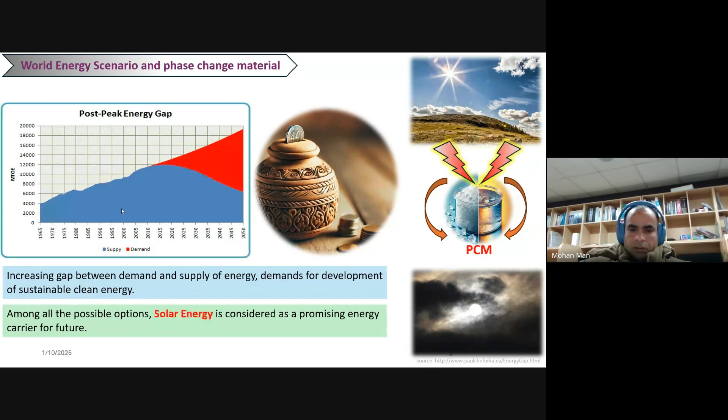So in continuation of the world energy scenario, we can see that was the fundamental of the energy storage material. If we go a little more technical, we can see there are two types of energy: high grade energy and low grade energy.

Low grade energy is what we need to utilize in real time applications or domestic household applications. So when we convert high grade energy to low grade energy - high grade energy is electrical energy, chemical energy, kinetic energy, and nuclear mechanical energy. These are the high grade energies.

But low grade energy is what? Directly heat, waste, radiant heat. Suppose we want to warm water or cook food - this type of energy is called low grade energy.

This thing already Dr. Adarsh Pandey has given in his talk. Then whenever we convert high grade energy to low grade energy, there are some losses.

So in this way we can utilize the phase change material or the energy storage material. Throughout this presentation, sometimes I will use the term energy storage material and sometimes phase change material - both are similar. Energy storage material is a vast category, and phase change material is one category within it. So please consider energy storage material and phase change material as having similar meaning.

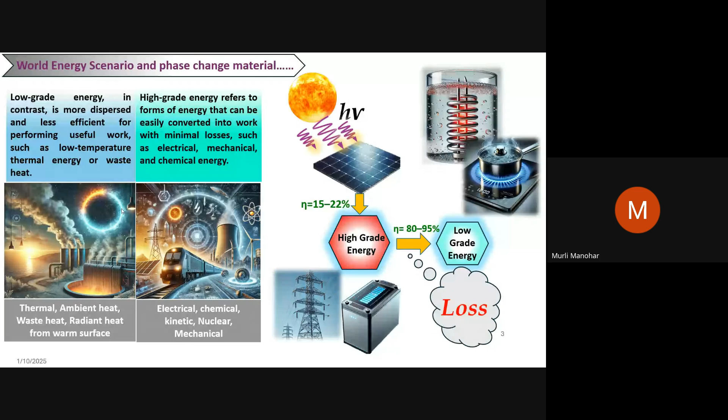So whenever we are converting solar energy through photovoltaic modules, there are some losses. Nearly, as you can see, the efficiency of the collector is only 15 to 22%, so roughly we can say there is a loss of 80% in this case.

So already we are getting a loss of 80% when we are converting solar energy to electrical energy to store in the battery or some other medium. Already we are getting a loss of 80%.

If we further convert that electrical energy to utilize for low grade energy, like using electricity to heat water or cook food, in that case also joule losses will occur. Joule losses happen when electrical energy is utilized to convert it to heat.

In that case also the efficiency is 80 to 95%. So in this way we are again getting a loss of 5 to 20%. So in this way, we can see the losses.

So what can we conclude from here? If we are converting high grade energy to low grade energy, there are several losses. To avoid these losses, what does the PCM do? PCM can store energy in low grade form only, meaning PCM can store energy as heat only, not in electrical form.

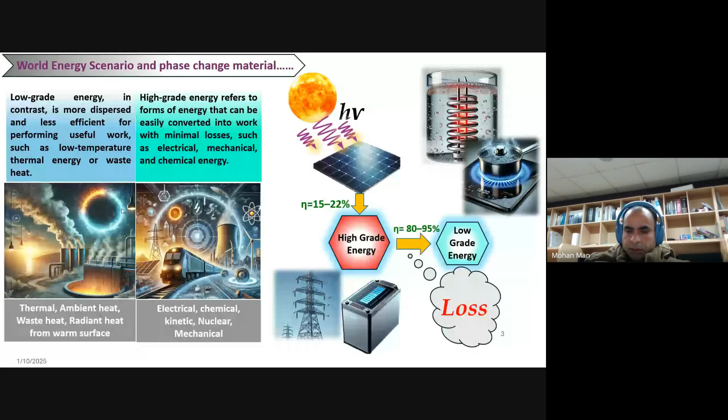Now, these were the scenarios of phase change material. Now let's start with the fundamentals - what is phase change material and their types?

First, I wish to introduce phase change material as ice and water. In case of ice and water, everyone knows ice has three phases: solid, liquid, and vapor. At a certain temperature water becomes solid, and at a certain temperature the solid becomes water. In this way we can say ice and water is a phase change material.

Similarly, paraffin wax - in general we can just say wax - is also a phase change material.

Generally we are using these for energy storage application, thermal energy application. You can see in the figure, wax is like what we use to make candles. That is the phase change material, or paraffin wax we can say. And also salt hydrate, which is also a phase change material, but the melting temperature of these materials is a little higher than paraffin wax as well as the ice-water combination.

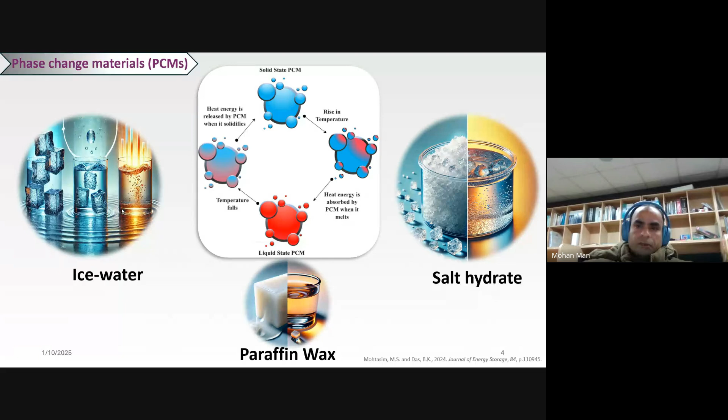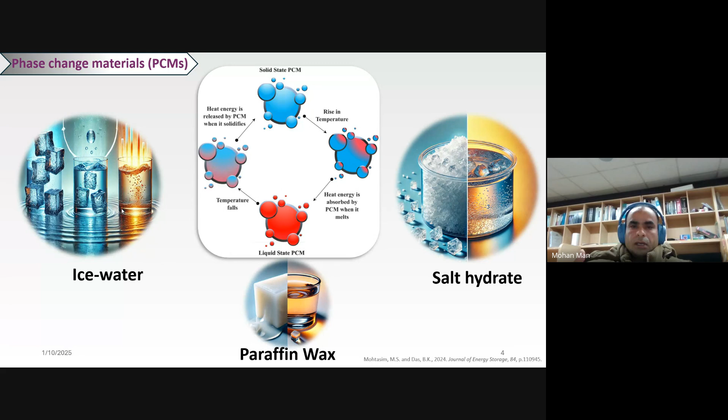Further we will go about this phase change material's phase changing temperature. In the middle figure also you can see how the phase change material takes heat and converts its phase, and how the heat transition takes place. So in the solid state, if we raise the temperature, it will change phase and become liquid. And further, if heat from the liquid phase is transferred to the surrounding or other medium, it will again change its phase and become solid.

Now this was the fundamental of the phase change material and the scenario. Now we will go for the multifunctional PCM. As literature says, in early days phase change material, or PCM in short, was utilized only for thermal energy storage.

As demand increases, as material efficiency, cost effectiveness, and compact design come into existence, everyone goes towards multifunctional things. So in this way, multifunctional PCM also comes to the picture. When material efficiency is required, multifunctional PCM combines multiple properties into a single material. Further, in the upcoming slides, we will see what applications exist, through which we can say PCM is a multifunctional material.

So as of now, I only discussed thermal energy storage. In a later slide, I will go for their diverse applications. Based on that, I will define multifunctional PCM. So now I'm going only into what is multifunctional PCM and why multifunctional PCM comes to the picture.

Further, when cost effectiveness comes into the picture, by integrating multifunctionality such as optothermal conversion or EMI shielding, if someone wants to make such a material, all the functions will come together in a single material. That is called cost effectiveness. In such a way, the multifunctional PCM comes to the picture.

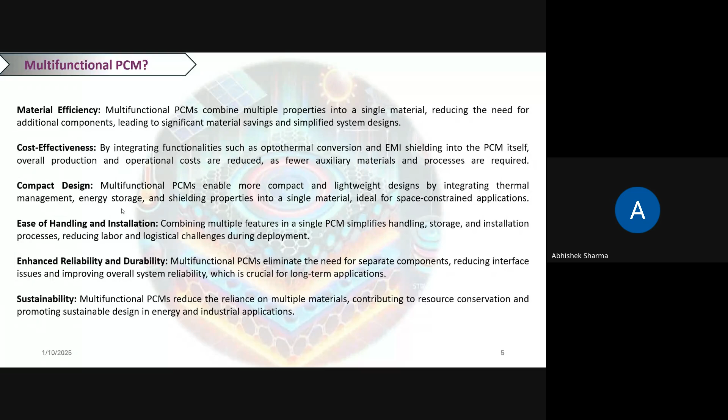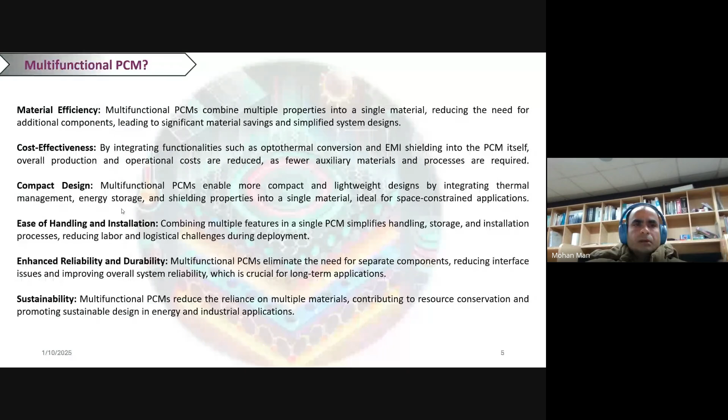Okay, so material handling and installation will become easy in case of multifunctional PCM. So these are some basic things through which we can understand why multifunctional PCM is needed. In short, I can say to save money and to save effort, we can design the multifunctional PCM, or we want to design the multifunctional PCM.

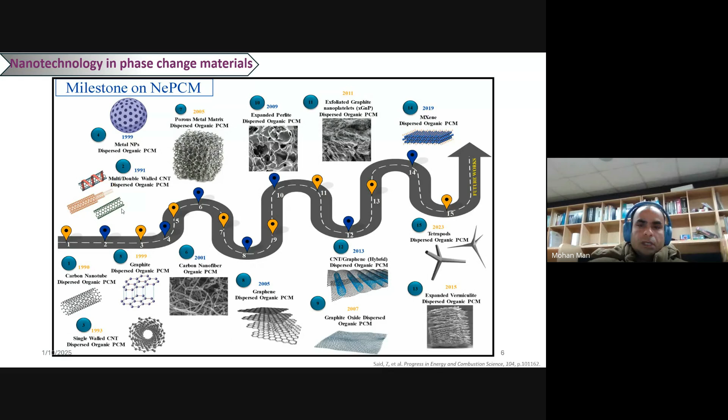These are the journey of phase change material from 1990 to 2023, and it's still going on. I'm also trying to get some better results through incorporation of not only 1D, not only 2D, but hybrid material. I'm trying to get the multifunctionality of the phase change material.

So as I already told you, phase change material is nothing but an energy storage material that stores energy by changing phase. I will discuss more about phase change material in upcoming slides. These are some types of phase change material, basically categorized into 3 types: organic, inorganic, and bio-based PCM.

Organic PCM is the most common research material, I can say, because I've gone through many publications. In most publications, I have seen organic PCM. Why? Because organic PCM is easily available, non-corrosive in nature, and its melting temperature is also suitable for a wide range of applications. The only disadvantage of most phase change materials is their low thermal conductivity.

Especially organic phase change material has the disadvantage of flammability. It easily catches fire. So this is a disadvantage, but there are several advantages of organic phase change material.

The fundamental phase change material as an organic is paraffin wax. Further, organic phase change material is divided into 2 categories: paraffinic and non-paraffinic. Paraffinic derives from petroleum products, whereas non-paraffinic is fatty acid, alcohol, ester, glycols. The most common examples are stearic acid and lauric acid, whereas paraffinic is paraffin wax. If we compare these two, paraffinic and non-paraffinic, the advantage of non-paraffinic is high latent heat.

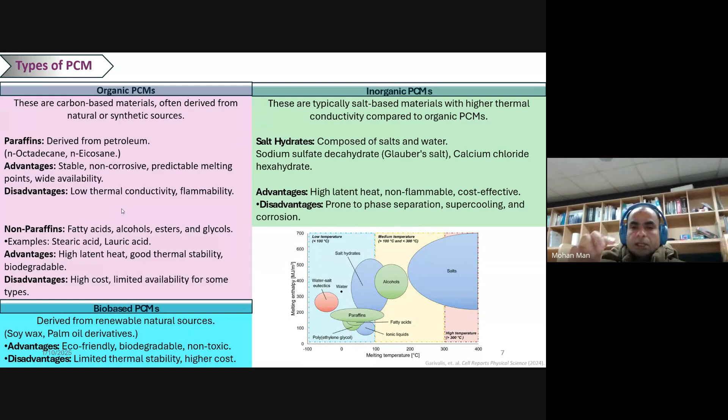So what we can correlate from this: if we want to store heat from the solar, we need less amount of salt, whereas to store the same amount of heat, we have to utilize more paraffin wax or other materials having less melting enthalpy. So based on these things we have to design the energy storage system. Later we will discuss how we can find this melting enthalpy through experiment. I'm going to give some brief introduction to calculate or analyze this melting enthalpy. Okay.

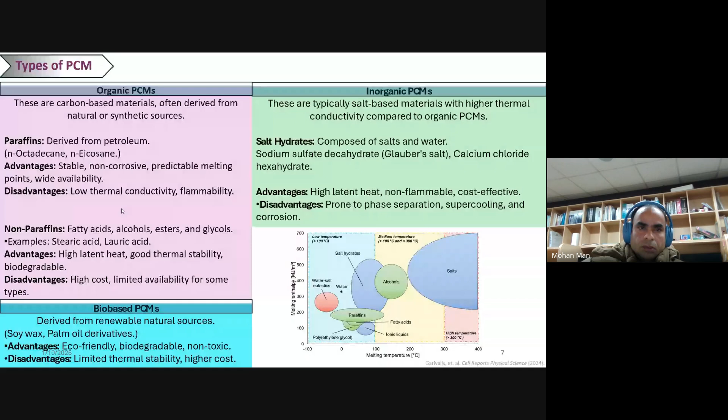So from this slide, we are going to understand once again the principle of phase change material, how the phase change material stores the heat. I think you might be aware of sensible heat and latent heat. So in case of phase change material, as the name implies, phase change means phase is going to change, either liquid to solid or solid to liquid. Only the heat when the phase is changing is what we can utilize in case of PCM.

So when the phase change occurs, what heat is useful? Not the sensible heat, only the latent heat comes into the picture. So in short, in the fundamental principle of PCM, only the latent heat is utilized. There are certain other energy storage materials that utilize sensible heat also. Sensible heat is when the temperature of the material is rising but the phase is not changing. But when the temperature is constant and the phase is changing, that is the latent heat.

Through one basic fundamental example, I wish to convey this message once again. When we start boiling water from the normal temperature of household water, like 25 degrees, and the boiling occurs at normal atmospheric pressure, what is the temperature? In that case, the temperature is nearly 100 degrees. So when we start boiling water from 30, or whatever the room temperature is, let's consider 30 degrees as room temperature. From 30 to 100, the temperature will rise, but water will not change its phase.

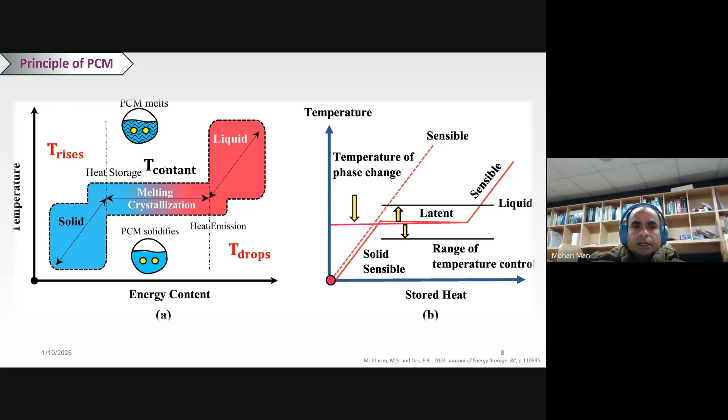I will tell you this in detail in the next slide again. So these are the fundamentals of phase change materials. In short, phase change materials utilize only the latent heat, when the phase is changing and the temperature remains constant.

Now, limitations of PCM. In general, not only for organic or inorganic, all three kinds of PCM, organic, inorganic, and bio-derived PCM, which I discussed earlier, have two major disadvantages: low thermal conductivity and leakage during phase change. Apart from these two, there are more disadvantages, such as supercooling, phase separation, volumetric expansion, cost, corrosion, environmental safety, and other things that we are not going to discuss. Definitely we have to work on those, but the major disadvantages are low thermal conductivity and leakage.

As the name itself says, low thermal conductivity. In the figure you can also see it has less tendency to transfer its heat. Very fundamentally, if the PCM has stored energy, it's not able to transfer that stored energy efficiently. That is low thermal conductivity.

Also, if the PCM is changing its phase while kept in a certain container, it will transfer its phase from solid to liquid. In that case, it can leak from somewhere. So this is one more thing that we have to address through nanomaterials. How can we stop this leakage, and how can we improve the thermal conductivity? These are the two major things.

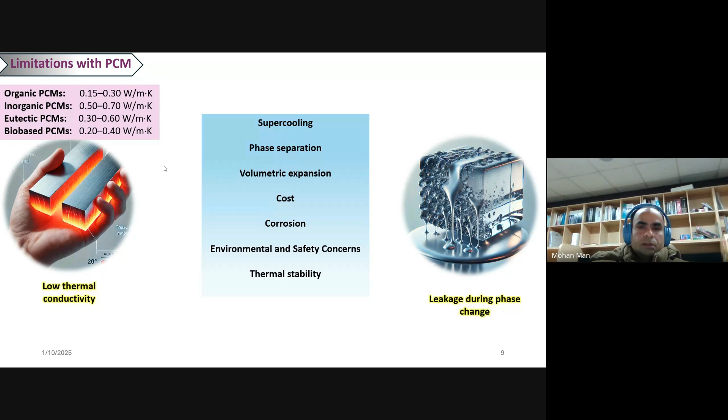Maybe you have some doubt why we are focusing more on thermal conductivity, because if you see the literature, most of the research work focuses on thermal conductivity. Why we focus on thermal conductivity, we will see in the next slide or an upcoming slide.

As we have seen the disadvantages or drawbacks of PCM, now we will go to the required properties of PCM. In the case of thermal properties, you can see high latent heat of fusion. As I already told you, a PCM having high latent heat or heat of fusion means that when it changes phase from solid to liquid or liquid to solid, it should store more heat. That is the most important requirement for an energy storage material. Also, appropriate phase transition, I would say appropriate based on the application.

So you can see the household or domestic application needs temperature around 60 to 80 degree or 40 to 80 degree. But for industrial application, the temperature range is a little higher, 200 or 400 degree. So based on the application, the phase transition temperature of the phase change material should be available. High thermal conductivity is one important property of the phase change material,

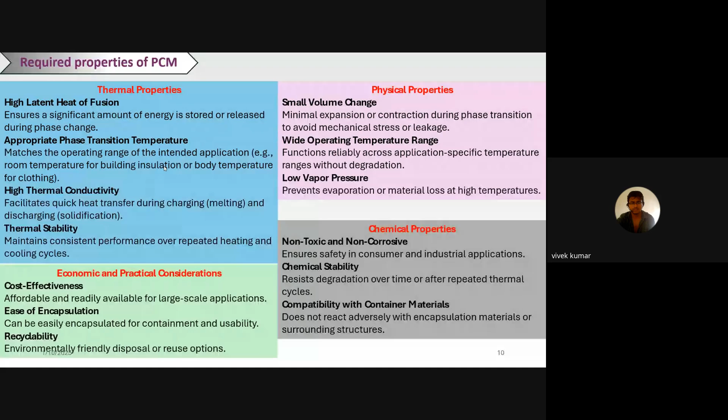Okay. So I was talking about the thermal conductivity. The material has already stored heat in the daytime through the solar collector, so it possesses certain heat. If you want to utilize that heat for any application and the thermal conductivity is high, it will easily release the heat to the room or any application. We will discuss this further. So this is one more property that we want.

So if you heat the coconut oil at very high temperature, what will happen? It will evaporate. Take a pan, put the coconut oil in the pan and start the burner. It will start fume formation, and it will evaporate after a certain time. So thermal stability is also one important property. If we are utilizing a phase change material at a certain temperature, the material should not degrade its property, and mass transfer should not take place. That is the thermal stability.

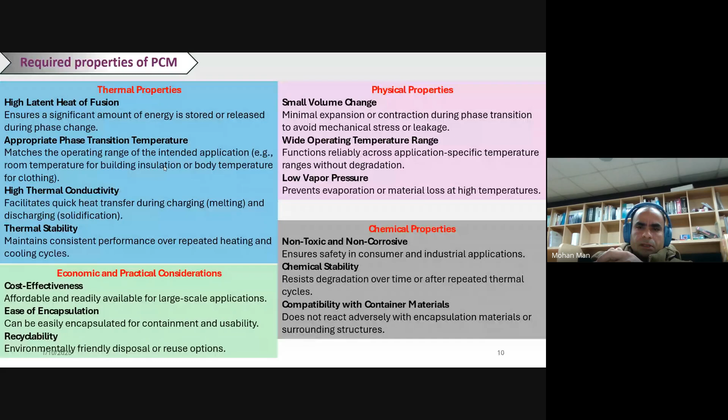Also economical, as you know, is a very common thing. Cost effectiveness and recyclability: these are some economical and practical considerations. Chemical properties: it should be non-toxic, non-corrosive. Chemical stability, as I already told you, compatibility with container material, that should be not corrosive in nature.

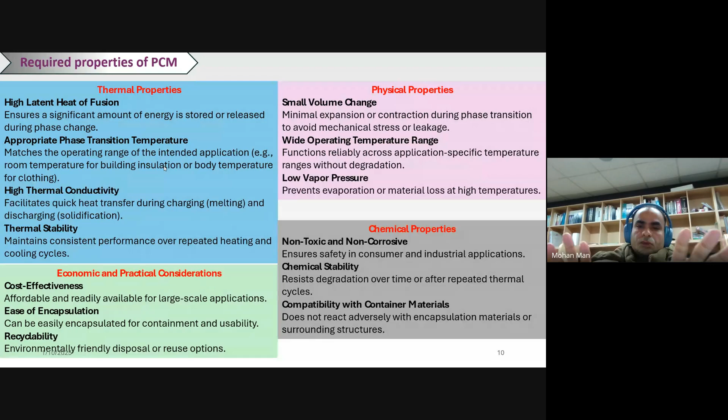Chemical stability means if you are keeping the PCM in a certain container, it should not react with the container material or whatever auxiliary things we are utilizing in the system. It should be non-reactive with those things. Definitely non-toxic is the prime, most important chemical property. It is a safety concern for the consumer as well as the industrial application. So these are some required properties of the PCM.

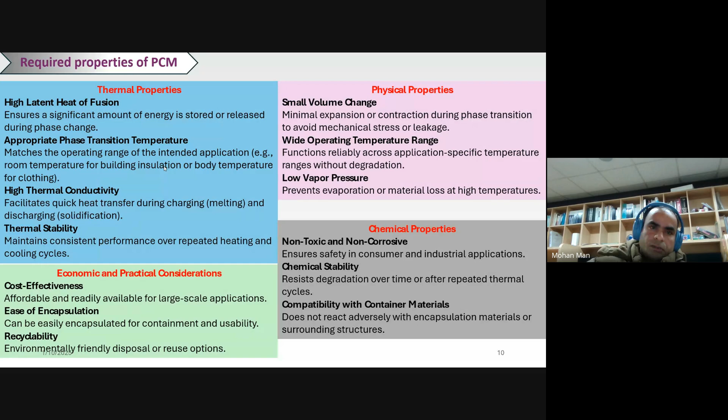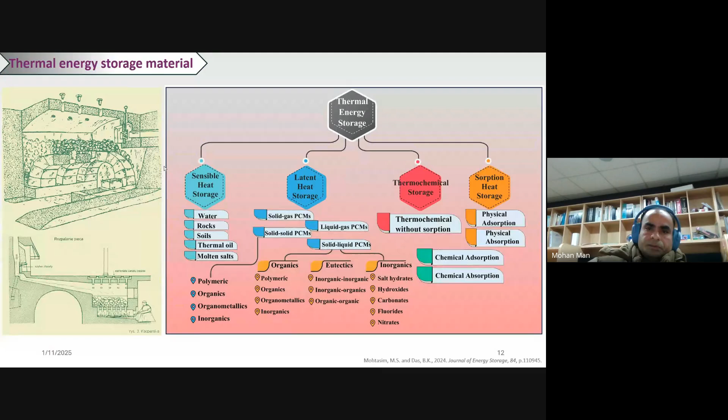Because if you want to utilize solar energy through solar collectors, concentrating solar collectors, to circulate a certain fluid to run the turbine, it definitely needs heat, but the heat is available only in the daytime. In daytime there is no problem running the turbine, because the concentrating solar collector is able to create a temperature around 250 or 200 degrees centigrade.

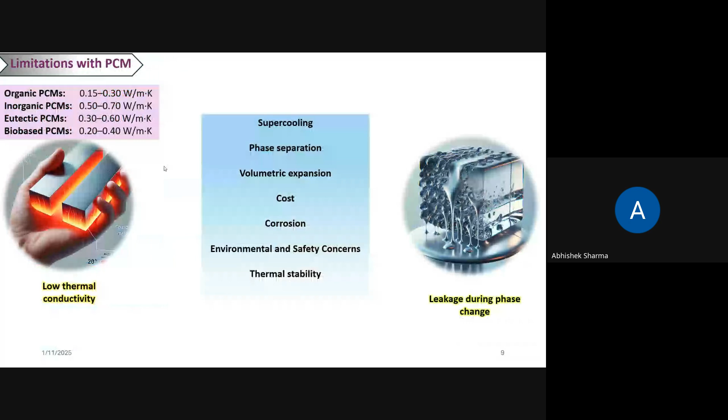And Mr. Suraj Kumar asked one question - can you provide some examples of popular phase change materials used in various industries?

The most popular phase change material is paraffin wax. Even I am working with this, and most publications show it used in industries too. But as per my knowledge, since I am not an industry person, in academic research paraffin wax and stearic acid are the most common examples. In industry we cannot say any specific example, because the material depends on the application.

If a certain company is designing an application for 30 to 100 degrees, organic phase change material can be taken. But if an industry is designing for 300 to 600 degrees, hydrate salts can be utilized. So it is wrong to say there is a common example for any application; based on application we have to choose the phase change material.

But as per my knowledge, academic research basically deals with paraffin wax and stearic acid. These are the two most common phase change materials.

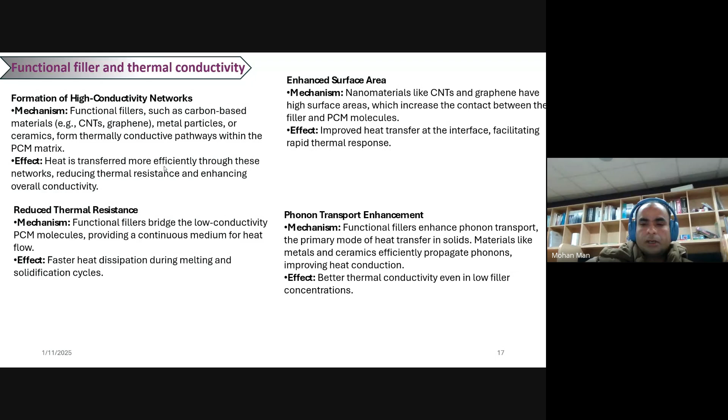I hope whoever asked the question is satisfied. And if he wants to talk later, at the end, we can also discuss this further.

Yes, definitely. I was sorry for the inconvenience. Just a minute. Right.

Right, it's a little bit of repetition of the slide, but some points need to be discussed in this slide also. I think functional filler and PCM performance.

What does the functional filler do? As I have already told many times, it improves thermal conductivity, heat transfer, and high latent heat. Apart from that, one important thing is photothermal conversion, which definitely I have to discuss.

Photothermal conversion, I think this should be discussed more. For phase change material, if you want to store heat, there are two ways: one is indirect way and one is direct way. Indirect way is what I have to show with this example.

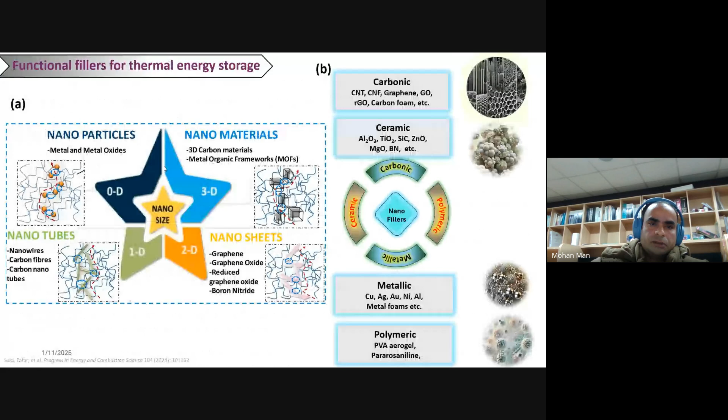Okay, so this is the indirect way. If someone wants to store heat, he has to utilize a solar collector. The solar collector will absorb heat, transfer it to the heat transfer fluid, and it will go to the thermal energy storage material.

This is the indirect way. But when the direct way comes into the picture, direct way means the phase change material itself stores heat directly from the solar source. There is no medium in between — that is different from the indirect way.

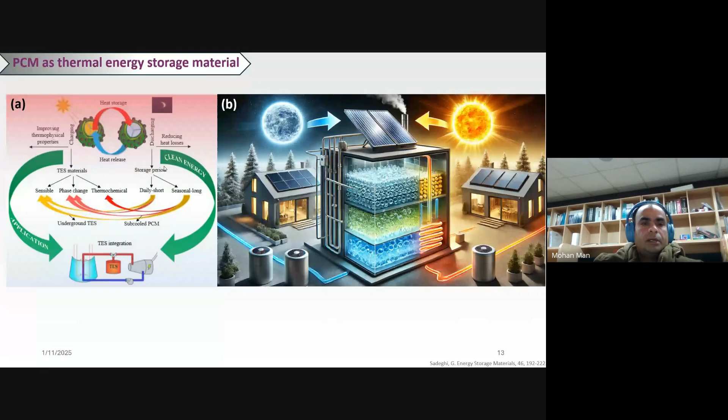Taking the same example once again, coconut oil: if we keep coconut oil outside the house in direct sunlight, it will store heat, rise in temperature, melt, and after certain time the temperature will become more likely 30 to 40 degrees. But what if you want to store heat at 60 degrees? I think it is not possible to reach 60 degrees under certain conditions.

But now nanotechnology comes into existence. If you mix certain nanomaterial into the phase change material that is capable of converting photon light — photon being nothing but a bundle of light — that nanomaterial will trap the photon, and that light automatically converts to heat. That is the photothermal material.

That kind of material we have to mix with the phase change material, so that the phase change material itself is able to store heat without any medium, without any heat transfer fluid. So this is one of the important properties we have to improve in phase change material, and it's also current research to increase the photothermal conversion property. The other properties like thermal conductivity and latent heat are also paramount important things we must consider while designing thermal storage material.

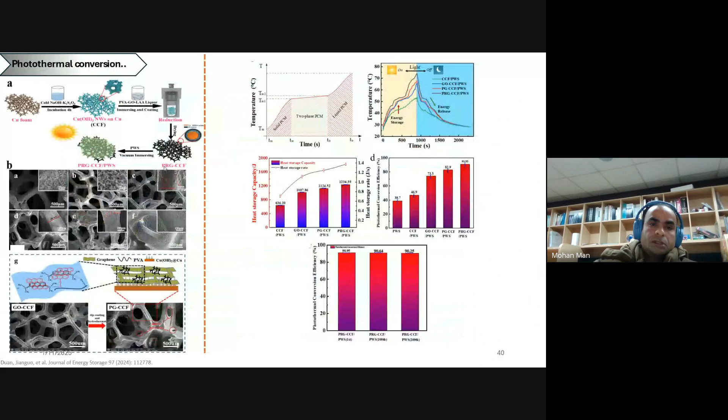In that case, we have to introduce certain nanomaterials. That material will improve the property of the phase change material so that it will convert light to heat. The fundamental material is CNT, carbon nanotube, which has photothermal property.

So to improve that property, we have to introduce certain nanomaterials. CNT is one material having that property. If you mix CNT into the phase change material, it will definitely improve the property so that it can take light and convert it to heat.

The recent work is going on with the material MXene. MXene is a latest material used in photothermal conversion of phase change material. If you mix MXene, which is a 2D material, not a 1D material like CNT, into the phase change material, it will improve the photothermal conversion. Photothermal conversion means photon to thermal, meaning light to heat.

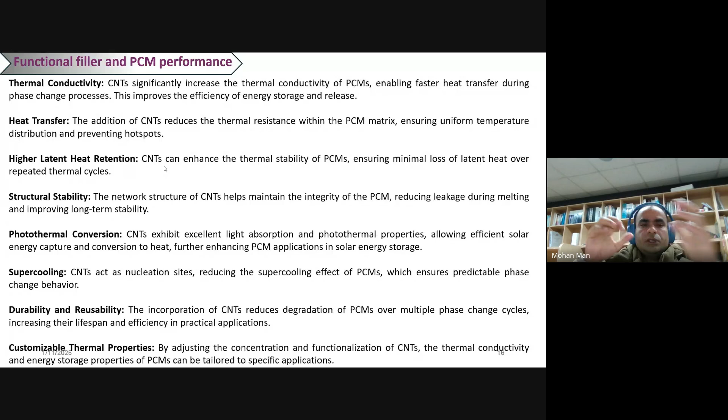So these are the applications of functional fillers in phase change materials. There are also other properties like durability and reusability. Durability means that if you repeat thermal cycling—heat, cool, heat, cool—certain phase change materials will lose their property or flexibility.

In that case, if you mix certain nanomaterial, most commonly CNT, it will improve the durability of the material. There are also other properties like customizable thermal property. If a certain material has thermal conductivity or phase change temperature of 40 degrees, mixing in CNT will change the thermal conductivity and phase change temperature.

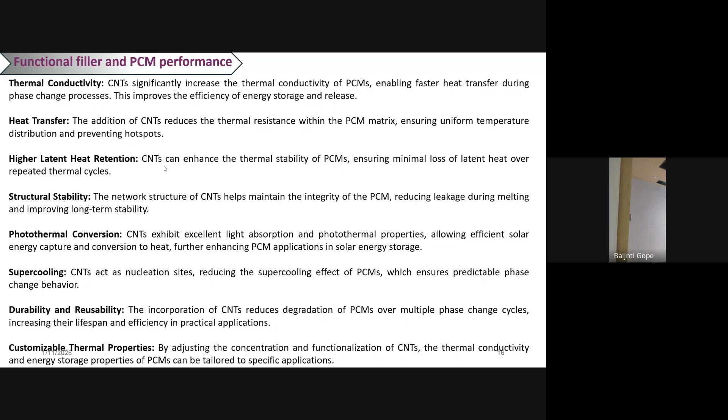Okay Abhishek sir, please tell me, because participants' time is also important. Yes, I'm not able to understand how much time is remaining. Please stop me whenever you feel it's over. If possible, kindly conclude in the coming 15 minutes. But no issue, the topic is very interesting and we are very thankful. Those who are not even aware about PCM material, you are telling from fundamental to advanced applications. Really, the topic is very interesting, and we are very thankful.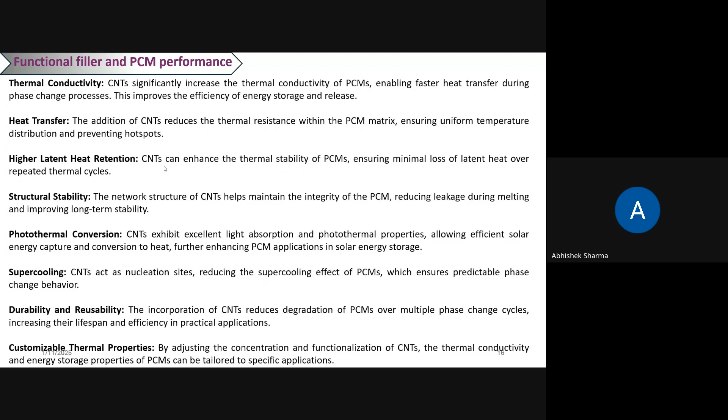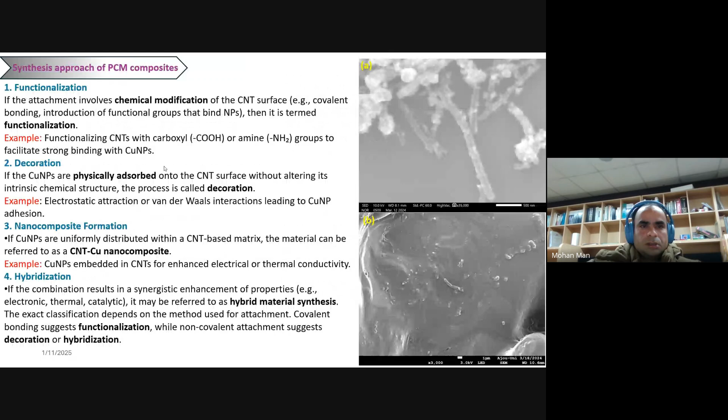Okay sir, thank you. So I think the fundamentals have been covered, and I will show you the applications in brief. But before that, I wish to show something that I have done and felt in characterization. In this slide there are four slides, I will tell you.

First slide is thermal characterization. Through that characterization, we are able to understand the thermal conductivity, latent heat property, and the mass degradation of the phase change material.

In the four things we can understand from the thermal characterization, phase transition temperature means at what temperature the phase change material will change its phase from solid to liquid, and again liquid to solid. That is the phase transition temperature.

It is possible only through the DSC. DSC is one characterization technique, differential scanning calorimetry. Through that we can understand the melting temperature and the latent heat, how much latent heat it needs or will release to change its phase from solid to liquid or liquid to solid.

Thermal stability means at what temperature you can... are you able to see the second figure? I think I will zoom. Is it visible? Yes, visible. In this figure, you are able to see weight percent is starting from 100. Is it visible, sir? Yes, visible.

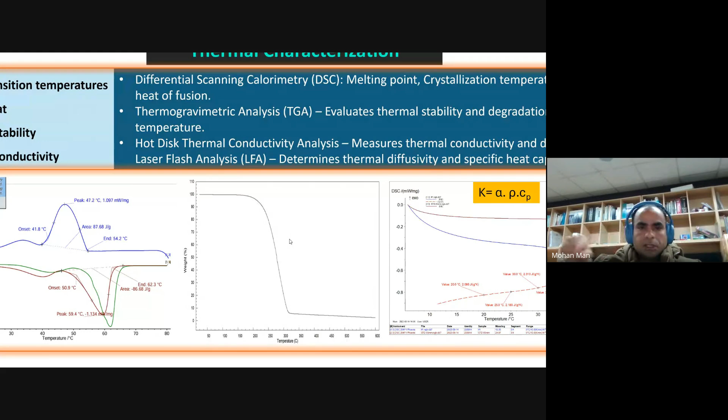So suppose the mass was 100%, and I'm increasing the temperature. In the x-axis you can see I started from 50 degrees, and I'm going further to raise the temperature: 50, 100, 150. At around 200 degrees, the mass, initially at 100, suddenly comes down. In that case, mass evaporation takes place. Mass has been lost; the graph has suddenly gone down.

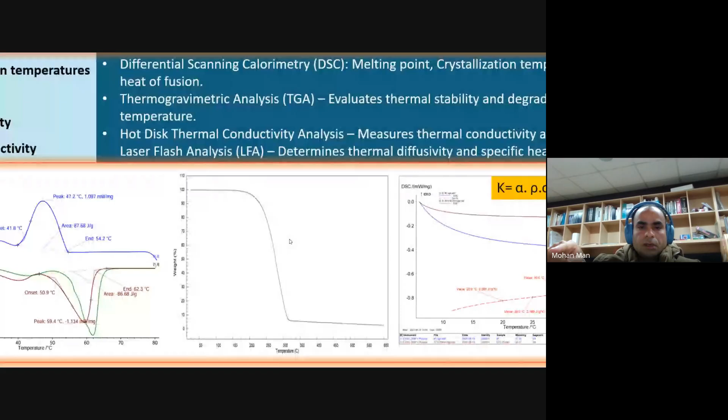So at what temperature has the mass gone down? At 200 degrees. That means this phase change material can be applicable within 200 degrees, not more than 200 degrees, because after 200 degrees the mass has evaporated into the atmosphere. So the TG analysis decides at what particular temperature this material can be utilized.

Are you able to understand, Dr. Sharma? Yes, sir. Everyone? Yes. Okay, I hope I'm able to explain. Sir, if you don't mind, can you explain again this DSC and TGA? Okay, once again I will explain. First I will start with DSC, then I will come back to the TGA.

We are taking the sample in one device, that is a DSC device, differential scanning calorimetry. We keep a very small mass of the phase change material in the device, only 2 mg; 2 to 20 mg we can keep. Liquid nitrogen will flow in the device, and in the plot you can see a curve at the bottom and top. The curve is automatically given by the machine.

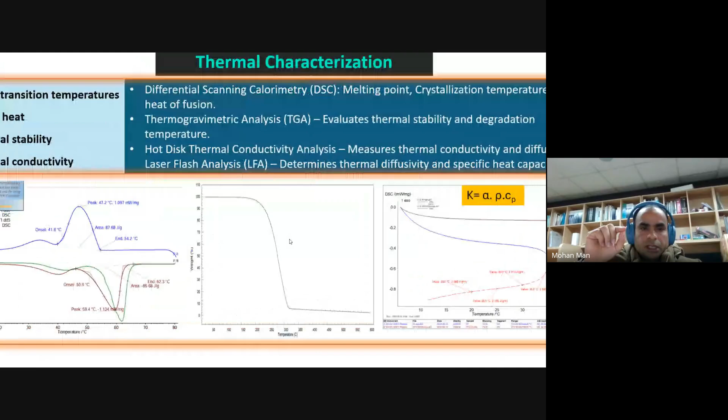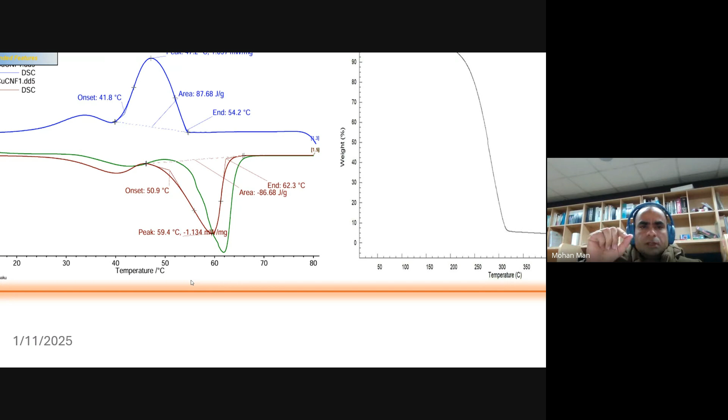In that you can see onset is written as... wait a moment. Now you can see onset written 50. There is certain software that gives all these plots without much effort. So you can see 50.9, that is the melting starting temperature. Through this graph you can predict that the PCM will start melting at 50.9 degrees centigrade.

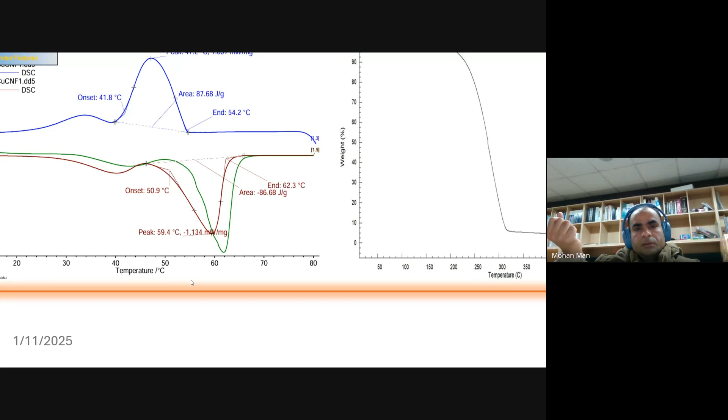Similarly, on the top side you can see solidification 41.8. Solidification will take place at this temperature. Also, the area of the curve, on the bottom side you can see minus 86.68. This is the heat: 1 gram of material will release 86.68 joules per gram. Through that we can understand the latent heat capacity of the phase change material, how much heat it needs or releases when the phase change takes place.

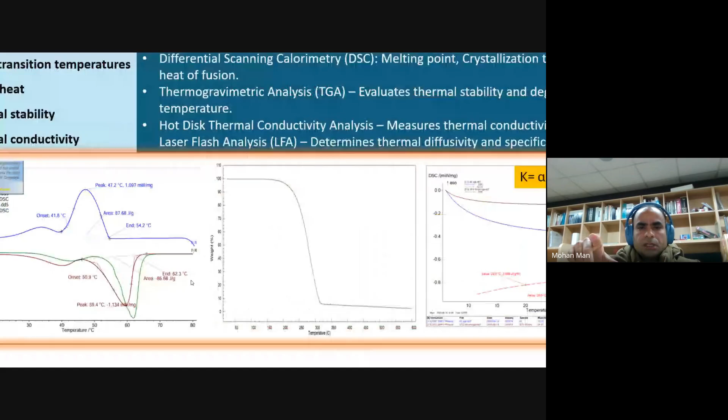So this is the DSC, the middle one is TGA, and the third one is simply thermal conductivity results. That's not a big thing, only you have to do the calculation. But in TGA, once again I wish to say, we start with 100% mass; whatever the mass, 1 mg, 2 mg, or 5 mg, that is considered as 100%, and the temperature keeps on increasing.

In that case, once you will see the curve will suddenly fall down. Whenever the percentage starts to decrease from 100, you can say mass loss takes place. It means if we restrict the application to that particular temperature, the mass will remain constant throughout the application.

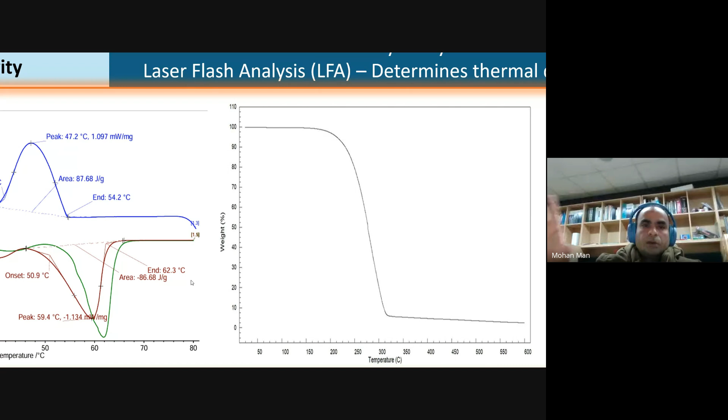But if we increase the temperature of the application, meaning we are using the material for a 300 degree application, in that case mass will automatically be lost. The material you are going to use for a particular application will no longer be with you; it will automatically evaporate to the atmosphere. So this is the TGA analysis. Roughly I have given some idea, hopefully you will understand. So these are the thermal characterizations.

And for optical and photothermal characterization, there is one apparatus known as a solar simulator. This apparatus gives light equivalent to the sun, because if you characterize the material in the real atmosphere under the real-time sun, the sun intensity is not constant, it will vary. In that case you will not predict the actual performance. So we have to use the simulator that will give exactly similar light to the sun and constant radiation in a closed chamber.

We will keep the material in that instrument, and it will show how the material is absorbing heat and how the temperature is changing. So this is some basic information on photothermal characterization.

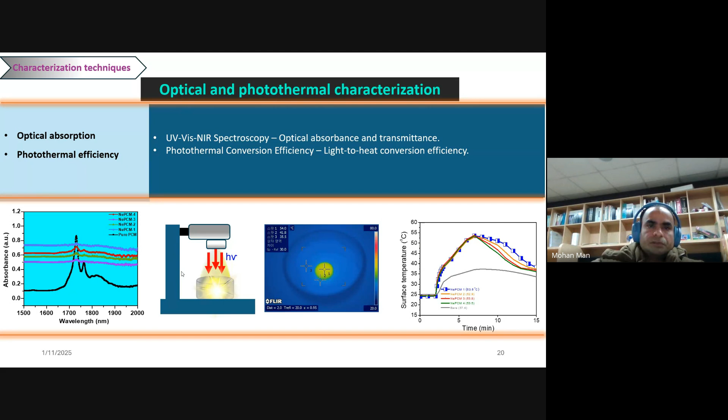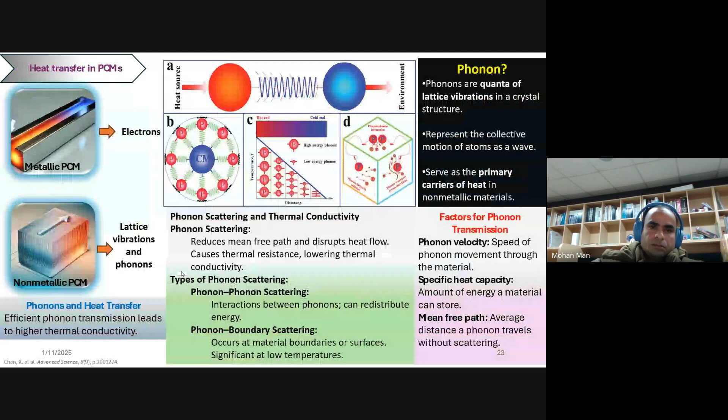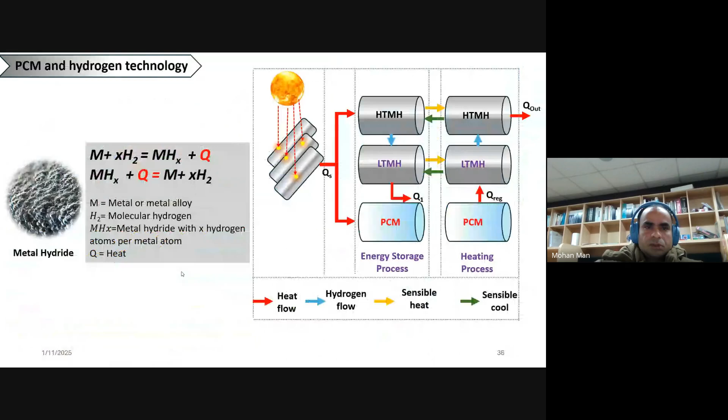I think a lot more things are remaining. Maybe I have to discuss this later. Anyway, I will close with some applications that I wish to show you very briefly. These are some applications that are being developed, under development, or already developed. These are from the literature, and also I am working on the same thing.

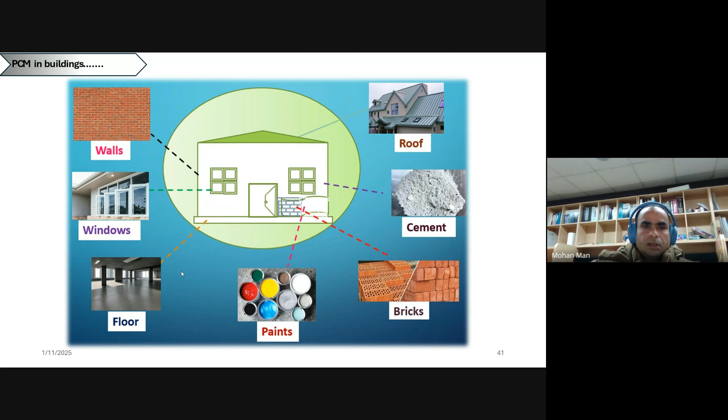Lot of things. In this building application, PCM can be utilized to fill in the building to store the heat, and further we can utilize it to make the house warm. This is one application of phase change material. They have made some prototype also, and analyzed the temperature difference before PCM installation and after PCM installation.

They made some 10 by 10 by 10 cm house as a model, filled the walls with the PCM and observed the temperature difference. Significant temperature difference has been analyzed, and they have also done it with the pure PCM and with the nano material mixed PCM. So significant difference has been analyzed with the pure PCM as well as with the nano material mixed PCM. Definitely nano mixed PCM has given the better performance.

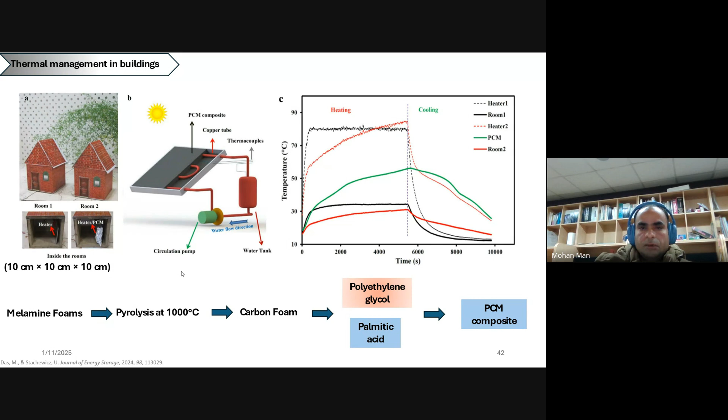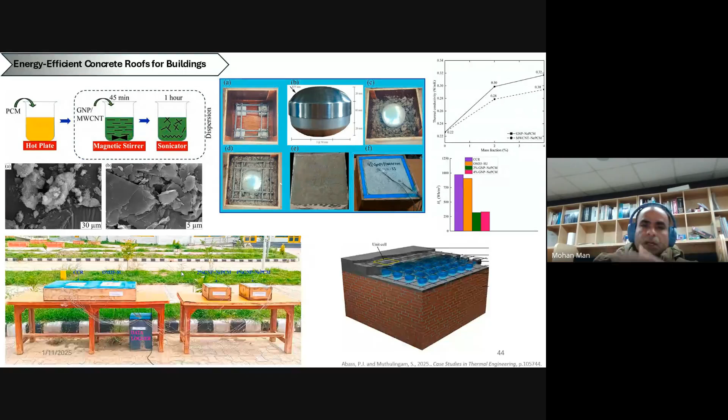That container, in the summertime, the heat will come from the outside of the building. The material will restrict the heat. How it will restrict? It will take the heat. It will melt in the daytime, and it will not give a way to go inside the house. In such a way, the house can be made cold.

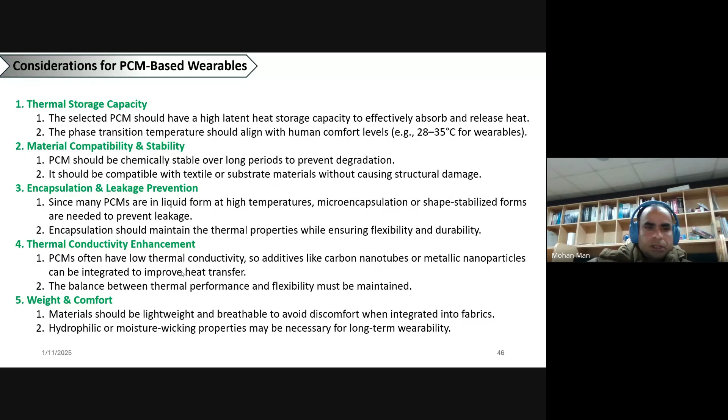Some desalination also. Desalination is nothing but converting the salt water to fresh drinking water. In that case also, you can see daytime desalination is possible because daytime sunlight is available. But what if the sun is not available?

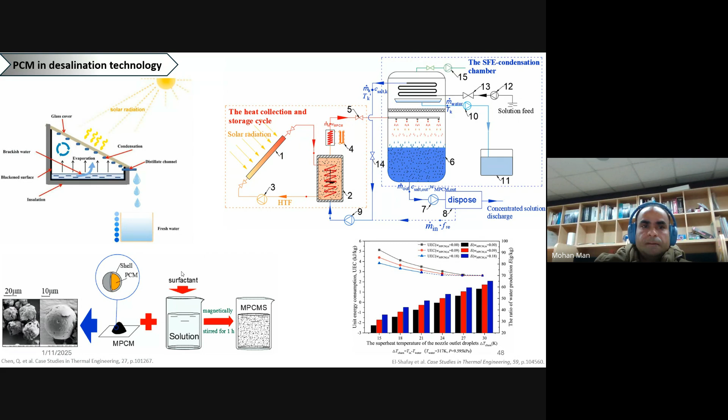In that time, the solar thermal energy material will store heat in the daytime, and immediately after the sunset it will start releasing the heat to the water. Then water will get evaporated, further condensed, and can be used as fresh water. So this is also one domain of phase change material, desalination, to generate fresh water.

Hopefully the conclusion is not this much big, I can say. Enhance thermal conductivity, structural property, and photothermal conversion. We can improve these things through certain nanotechnology, because a lot of research work has already been done in nanotechnology separately without PCM. Some people are developing or synthesizing nanomaterials, but they are not including their material with phase change material.

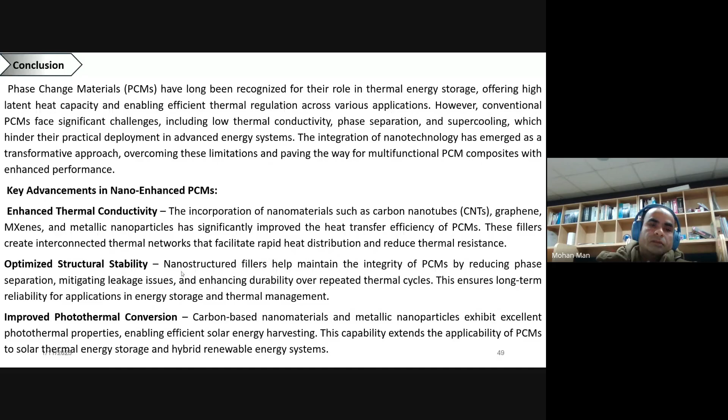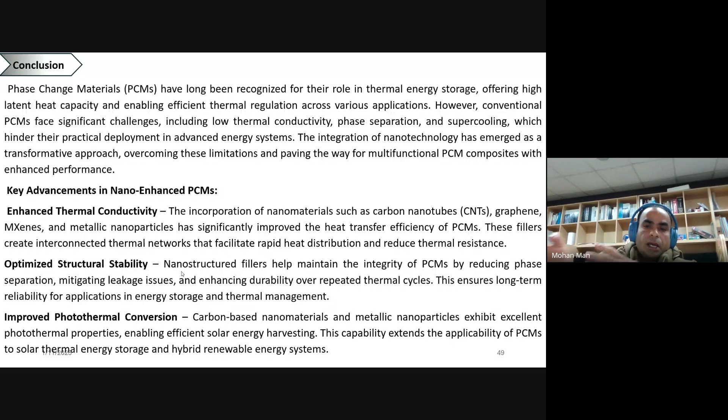If we include the nanomaterial in phase change material, definitely a lot more applications we can generate. This is the only conclusion I can say. Go for the literature, find out the nanomaterial and try to incorporate it in the phase change material. Definitely the property will improve based on the material you are choosing, and try to develop some application. So this is my conclusion. And future research, as I already said, try to develop some application based on the literature. Hopefully this I have done.